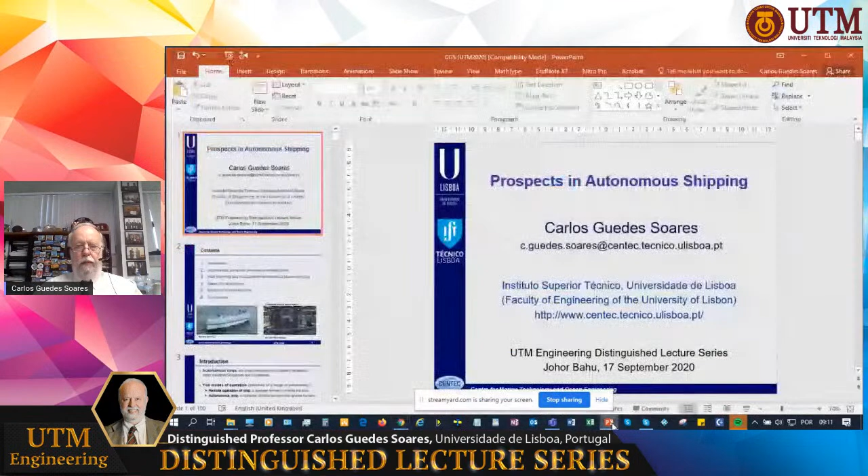I hope now you have been able to see the introductory slide with the indication of the title of my talk. Yes, Prof, we can see the slide. Thank you. Very good. Thank you very much.

So I think I can proceed. My lecture is a generic one, trying to bring the main points that are being discussed and involved in this problem, which is very complex and has different implications in the shipping and maritime industry. So I will be talking generally on the existing autonomous ships and remotely controlled ships, and we will discuss the differences.

Then I will discuss the main aspect of the autonomous ship, which is path planning and guidance. This is the main technological aspect that will bring the ship from one place to the other. And then I will address related aspects of safety and economy, which are important aspects that can motivate or allow this concept to go ahead, or can hinder it from progress. So those will be the main topics.

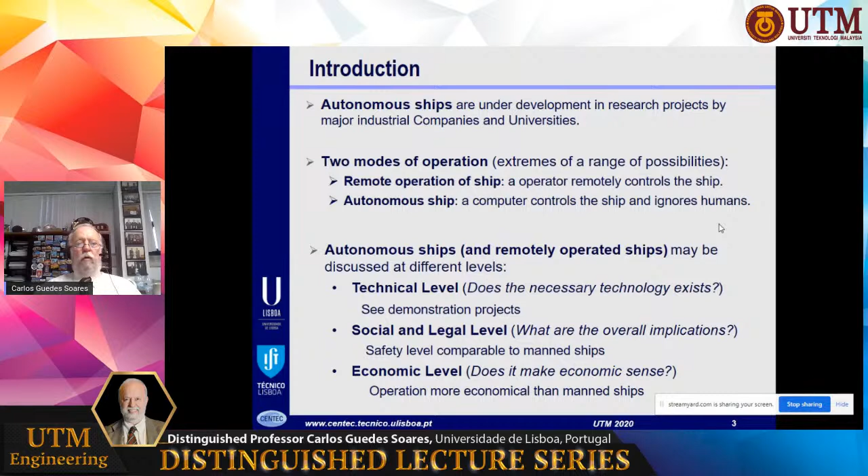Now it is important to start making some distinction between what is autonomy and what is automation. Autonomy is the ability of a system to make decisions, to adapt to unplanned circumstances, and to achieve what is expected from the system. So these decisions will be made without supervising agents within the system. Automation is simply to substitute a task that has been executed formerly by humans, which now will be executed by a technical system. So obviously an autonomous system must be automated, but an automated system is not necessarily autonomous.

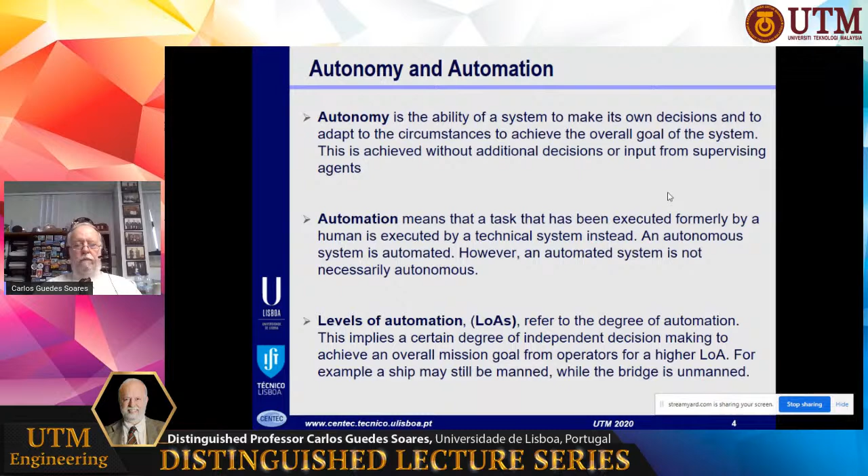And the other aspect that we need to consider is that there may be different levels of autonomy, different levels of automation, which refer to the degree of automation that is implemented in the ship.

In general, we will think that the autonomous ship operates with a dynamic autonomy, in which this level of autonomy is adjusted depending on a number of parameters that include the state of the ship, the weather conditions, the traffic density, the distance from the coast or the port. The basic idea is that ships will be autonomous when performing simple tasks. But when situations become complex, it is necessary that the human is supervising what the system is doing, and eventually is controlling it remotely in those conditions. So autonomous ships always require a monitoring and control center on shore.

You certainly see immediately the parallel situation with flights, which in the last few months we have not been able to travel and fly, but transportation aircrafts normally operate with control mechanisms, but for landing and starting the flight, then there is manual control. So this is a parallel to what is expected to be done in ships.

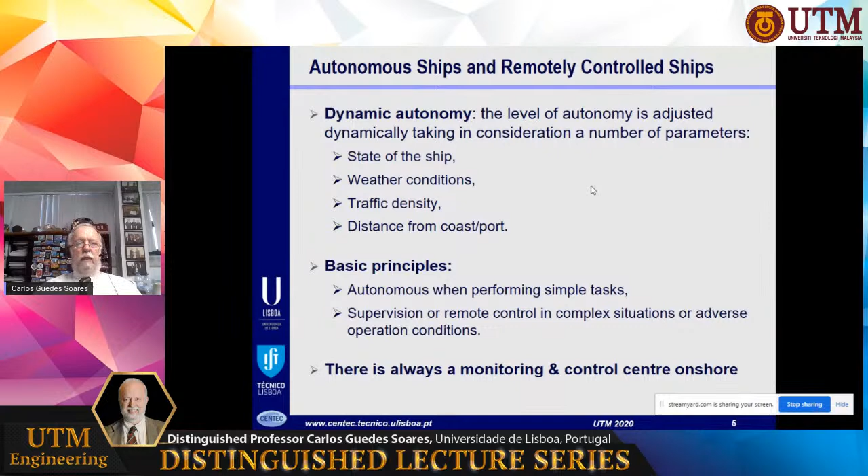Now the technologies for autonomous navigation, which are the main aspect that we require, are available. And in the case of the ship, there are some advantages compared to other autonomous vehicles, like cars and airplanes, which also are moving in the direction of autonomy or partial autonomy. So ships have low speeds, and this gives more time to interpret the sensor data and react on it. The requirements for ship maneuvering are appearing slowly, so it also gives time.

In general, the ship at sea is not confined to roads, to limited areas like a car. Although in some cases we have traffic separation lanes, and in those cases the ships have to go through a lane, which is a type of road. There are several options to collision avoidance, and in general there is less traffic density with ships than with cars.

The disadvantages are that the inertia of a ship is much larger. It is very difficult to maneuver and to stop a ship, and the communications can be difficult.

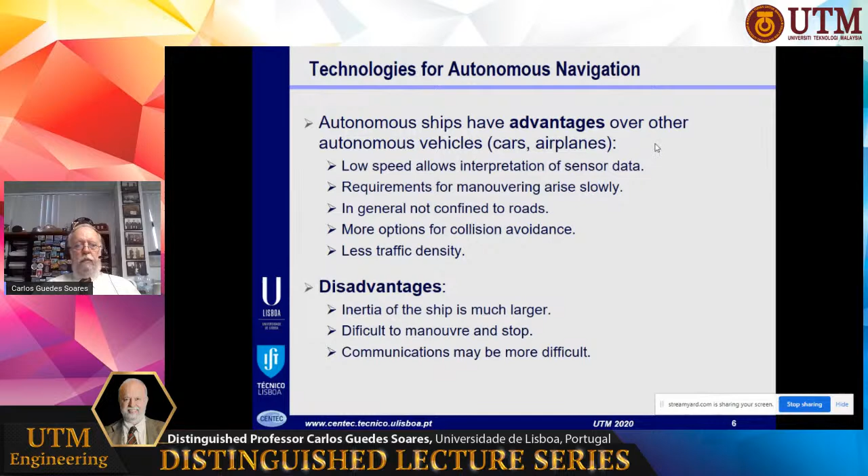Now, the main technologies for autonomous navigation are available, although they need some development and adaptation for autonomous ships.

Typically, the long-range situation is controlled by the ship radar, and in manned ships, the short range is done by humans that observe. Moving to autonomous ships, we have to use cameras to identify objects and short-range radars. There is also under investigation the use of LiDAR with cameras and radars.

So these are the areas that are under development for autonomous operation. We have to process all this data to identify all the obstacles at short range. Then with the information from GPS and the inertial sensors, we have the position of the ship, which can be related to the electronic charts to decide how to navigate and eventually avoid collisions if we have short-range obstacles.

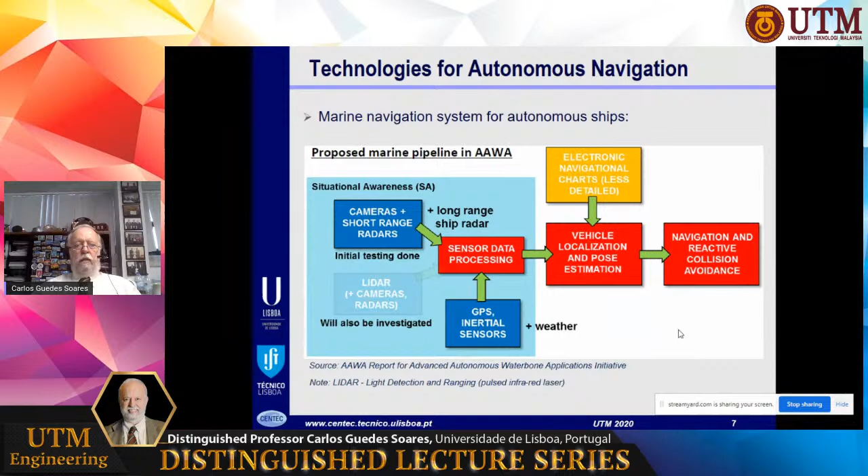So as I say, we have technology available. It is the short-range visualization, identification of the targets that still needs some further development.

Now, what are the drivers that are promoting autonomous shipping? Well, the advances in guidance and control of small autonomous vehicles provide the knowledge of the technology for moving the ship. We also have the problem that maritime safety

is very much related to accidents that are caused by human error. So there is this idea that substituting the human by a machine, we will have fewer errors and then we will have a safer environment.

There has also been an increasing difficulty in hiring competent crew for the ships. Life on board is more harsh than living in a big city center, so there has been less incentive for people to choose that profession.

Also, the manning on board is an important part of the cost of operation, so shipping companies have an economic incentive to reduce manning. And in general, the reduction of overall costs of maritime transportation is a trend that

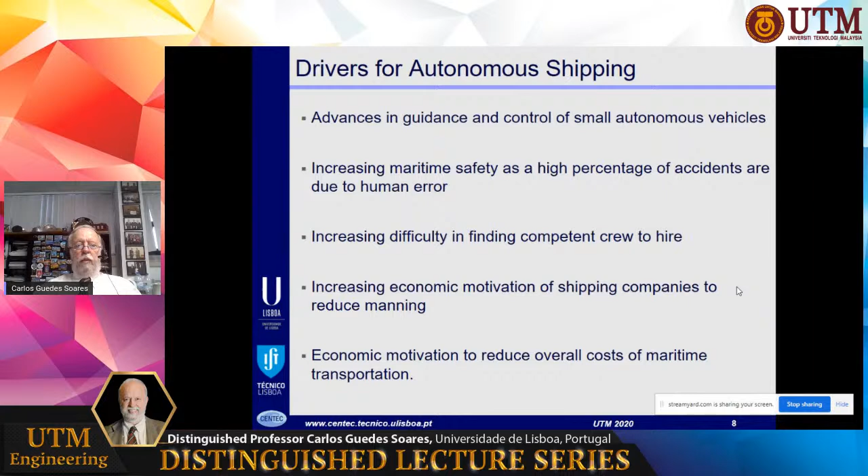looks at autonomous shipping because of this idea that reducing costs with the crew would lead to a more economic operation. The drawbacks and difficulties in promoting autonomous shipping are that there will be higher costs of additional equipment. Control, communication, and this type of equipment must be put on board. There must be redundancies, and this will add costs.

With so much equipment, the equipment also has probabilities of failure, so the ship will also be prone to accidents due to equipment failure or malfunction. And this will compete with the human errors of the manned situation.

Autonomy will also require onshore monitoring centers manned 24 hours, and this represents additional costs in establishing these centers and in manning them with crew.

Furthermore, to keep the safety of maritime traffic, it is being considered that there probably must be separate safe lanes for these autonomous ships in the approaches to land and ports when traffic is higher. This must be created to make sure there is a separation between autonomous ships and manned ships.

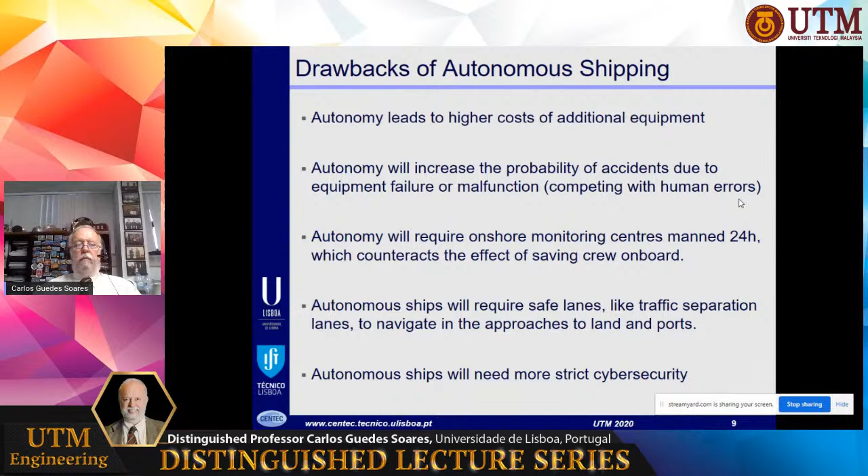Finally, autonomous ships will be prone to cybersecurity issues. They will be prone to cyber attacks, and therefore this is another area that needs special attention and, of course, investment to make sure that we have ships protected from that.

So how is the industry looking at this? Well, as you could imagine, equipment manufacturers are the main driving force, since this would need more equipment, and this would be very good for the equipment manufacturing industry.

Now, seafarers are profoundly opposed to this idea, as it happens in all industries where we see increased automation. There will be a big resistance in this direction.

Ship owners have been very quiet. On one hand, I think they are not convinced that this will be an economic success. On the other hand, I think they don't want to create frictions with their seafarers by advocating a solution that is not welcome by them.

The insurance companies are still not sure what is the safety level and how they will insure this type of vessels.

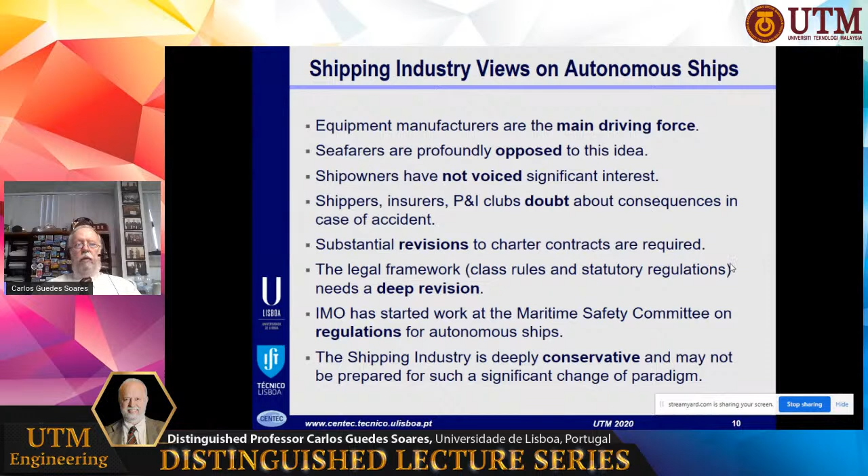If we move to autonomous ships, the charter contracts have to be revised, and the legal framework for the operation of these ships will need to be revised very much. The IMO, the International Maritime Organization, has already started working on this topic, looking at specific regulations to apply to autonomous ships. However, the shipping industry is somewhat conservative, and it may take some time before they are ready to really change the paradigm from manned ships to autonomous ships.

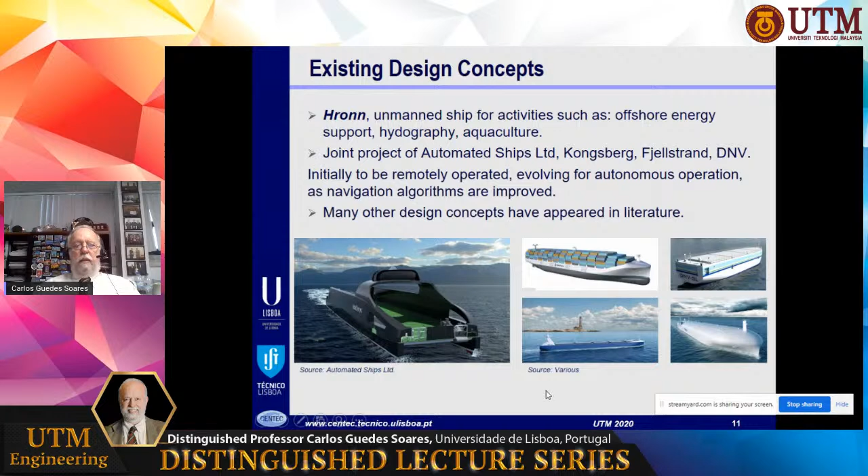Now, there are some concepts already available that have been developed in these research projects. There are designs that go from small ships like this one, for activities like offshore energy and aquaculture support, to larger ships like container ships and bulk carriers that have been designed and are being studied. We also have demonstrators that have been testing some of the technologies.

This is an example that was developed in this project on advanced autonomous waterborne applications. It is a double-ended ferry that uses radar, visual and thermal cameras, and LiDAR. As I indicated earlier, one of the challenges here is short-distance identification, and this is exactly what has been tested in this ship in bad weather conditions.

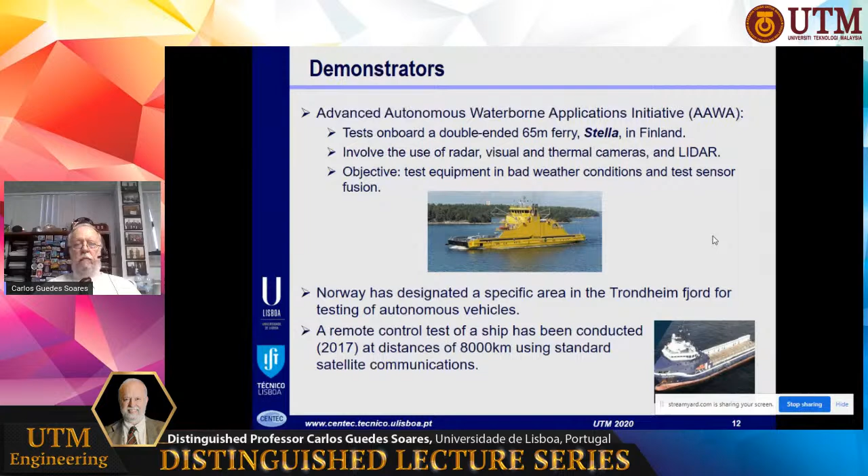Also in Norway, there has been testing in the Trondheim fjord. The autonomous vehicles have been tested to demonstrate their capabilities. I think presently the largest demonstrator is the Birkeland.

This is a container ship that has been developed to transport fertilizer from an inland plant to deep sea ports, over a distance of around 30 nautical miles.

This ship has already been built. It was launched in February 2020 in Romania, and you see it here. This is the model test, and this is the ship as built. Although, because of the pandemic, it has not progressed much since this period. But as you see, we have a demonstrator of 80 meters, a container ship, already on the way. It is 80 meters long and carries 120 TEU containers.

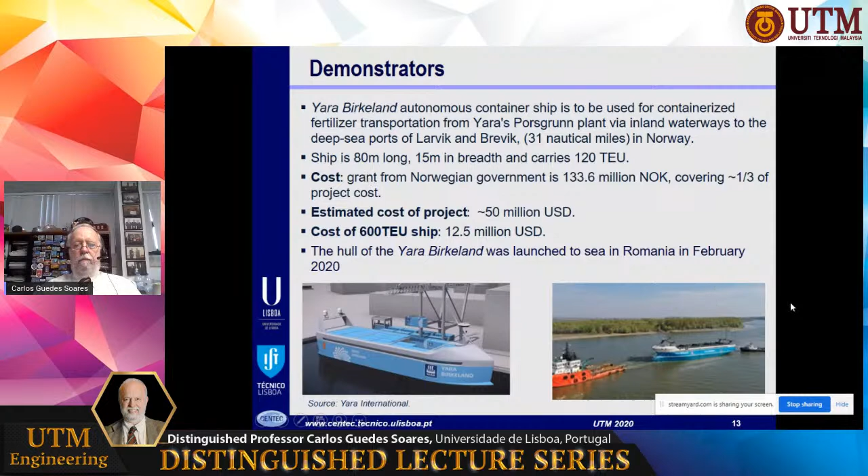Okay, so those are the technology aspects and how far we have arrived with the technology. We have already built one ship like that.

Now, the other aspect that needs to be considered is safety, as I have indicated earlier. The main concern is that the autonomous ship must be as safe and reliable so that it can be accepted by the regulatory bodies and by the public. The public may even demand that autonomous ships have a better safety performance than conventional ships, in the sense that why change if we are not changing to a better product? So it is necessary to demonstrate that the systems will not lead to an increased level of risk, in particular to loss of life, damage to the environment, or damage to the assets.

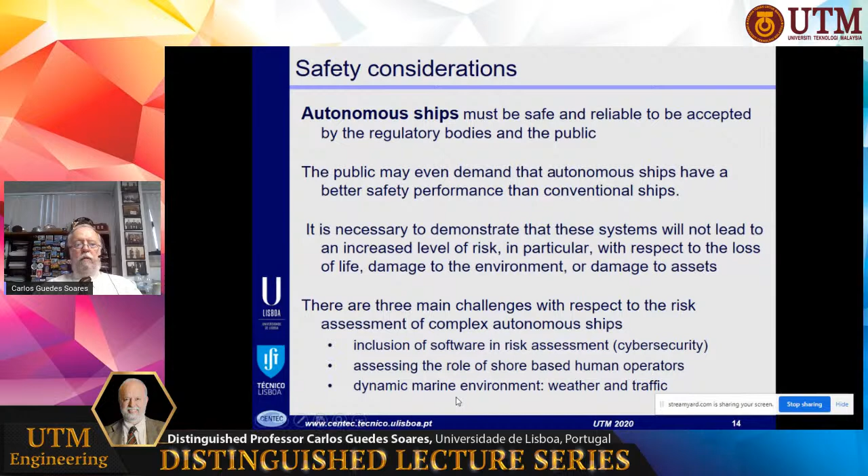And there are some main challenges in this. One aspect is that now in the risk assessment we have to include software, because the ship will be controlled entirely with software that controls all the control equipment and everything else. We have to assess what the role of the human operators is in the shore-based control. How do they interfere with safety? And what happens in dynamic environments, such as bad weather and heavy traffic.

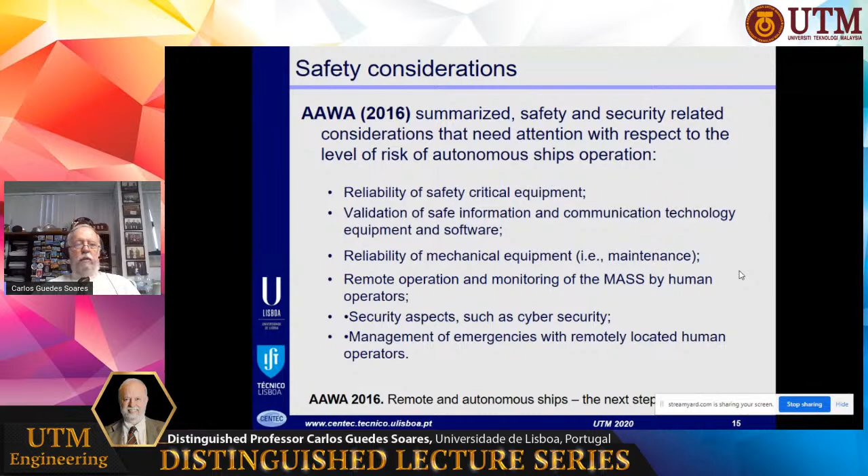We had an international consortium in a project that looked into this, and they summarized the safety and security considerations that need to be considered for assessing risk in autonomous ship operations. This includes the reliability of safety-critical equipment, the validation of communication technology, equipment and software, the maintenance aspects related to the reliability of mechanical equipment, the monitoring of remote operation by human operators, all the security aspects, in particular cybersecurity, and how we manage emergencies with remote operators. So these are the challenges that need to be addressed, and later in this presentation I will address them in slightly more detail.

On the economic front, which is another aspect that needs to be considered, we need more control equipment for the crew. However, we do not need onboard equipment for supporting the crew on board, and we also save the energy that is needed for that support equipment. This also allows for more space that can be used for transportation of cargo. However, we may need to use better quality fuel to avoid difficulties in operation. We will have extra costs for shore monitoring and extra costs for operating the shore monitoring center. So we have to balance all these different costs and check if the operation will be profitable, and therefore attractive to ship owners.

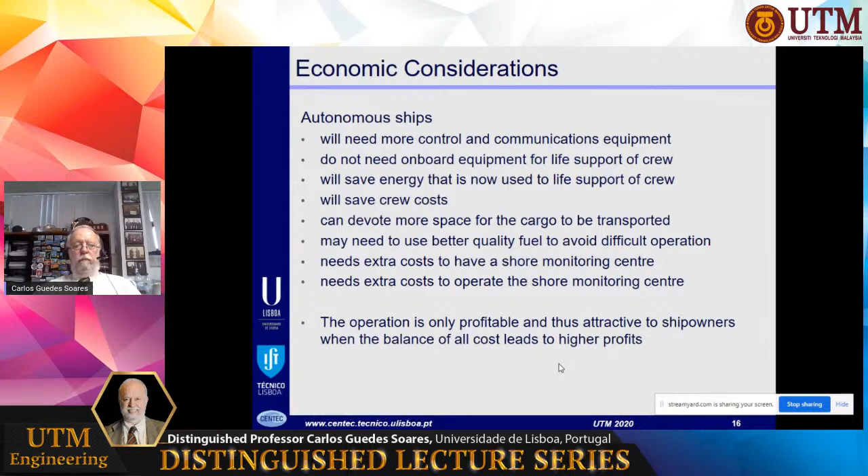So I hope I have given you a general overview of the problem area, and the constraints of both safety and economy.

And now I was planning to go relatively quickly through the technological aspects of the main part, which is the path planning and guidance of the autonomous vehicles.

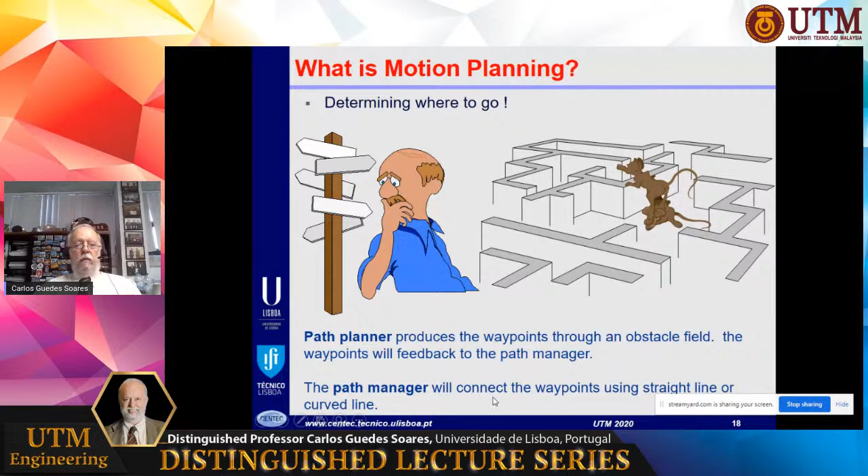First of all, let's clarify what motion planning is, which is the starting point. We have path planning that identifies the path that needs to be followed from the initial point to the final point, and this defines waypoints that need to be connected. Then we have a path manager that will connect these waypoints with straight lines or curved lines.

So we have the control architecture of the autonomous vessel. It has the path planning that uses the map, the destination, and the identification of static obstacles, and then defines the waypoints that will bring it from one point to the other. This gives information to the path manager that defines the path connecting the waypoints, and then passes the information to the guidance system that follows the path by defining the speed, the heading, and the commands that need to be taken.

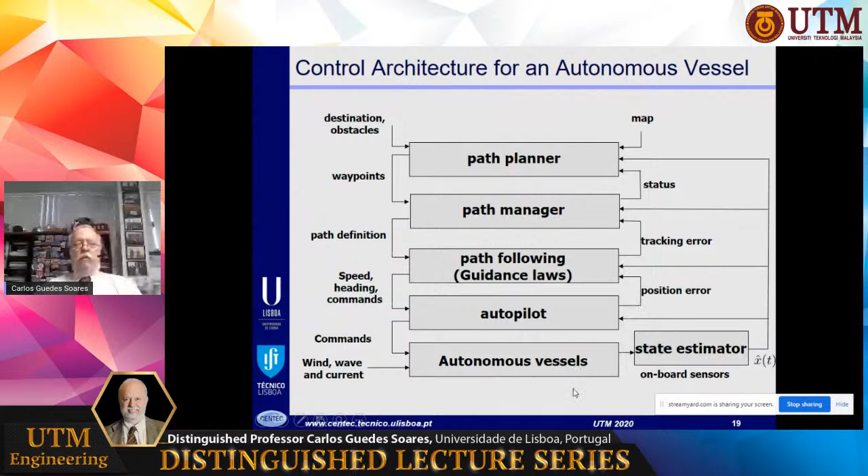The autopilot then makes sure that the heading of the ship is such as to follow the path, and the autonomous vessel will be acted on by external disturbances like wind, wave, and current, which will move it out of the path. So we have a state estimator based on onboard sensors that checks the position and feeds back to the system to check whether it is on position or needs correction. Those are the main elements of the architecture to ensure the ship follows the desired path.

Path planning and trajectory are related concepts. The path is just based on kinematic specifications, so it gives the geometry of the points where the ship has to go by, and the trajectory is the path plus the assigned time at which the points have to be passed. So trajectory planning has the path planning plus the control of the propulsion system to make sure the velocity of the ship is such that the time is observed at those points.

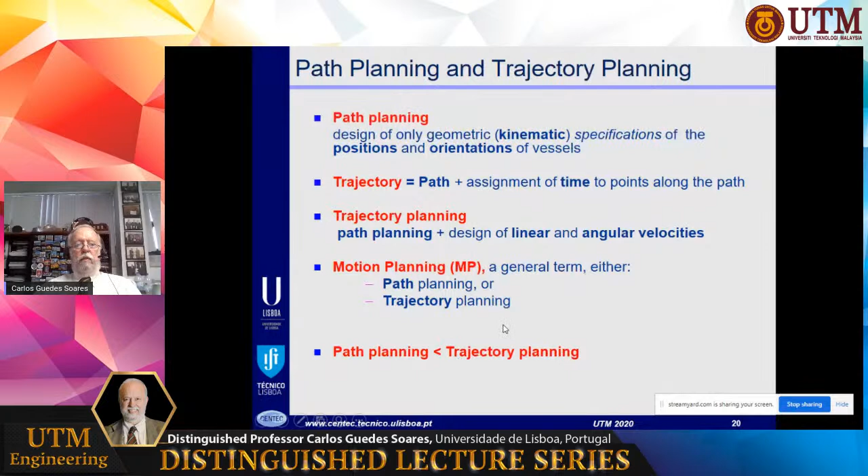In general, motion planning is used both for path planning and for trajectory planning, knowing that trajectory is a wider concept and path planning is sort of a subset of the trajectory. There are many techniques to identify the path; I will just mention a couple of them.

The Voronoi graph has been used, and the idea is that if we have a set of fixed obstacles and we want to go through them, the safest path is to keep the same distance from both obstacles. So this would be the safest between these two. Then if we want to go through these two, this would be the safest, the half distance between them. This would be the half distance between them. Therefore, the ship would go in a path like that to keep the largest distance away from stationary obstacles.

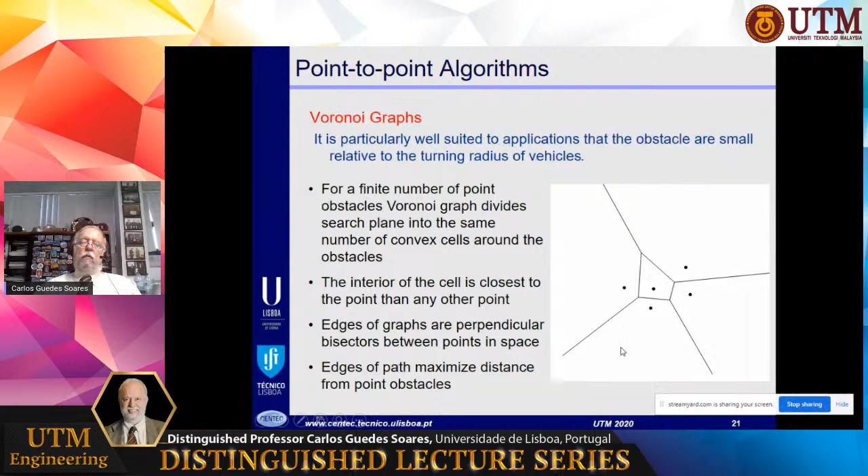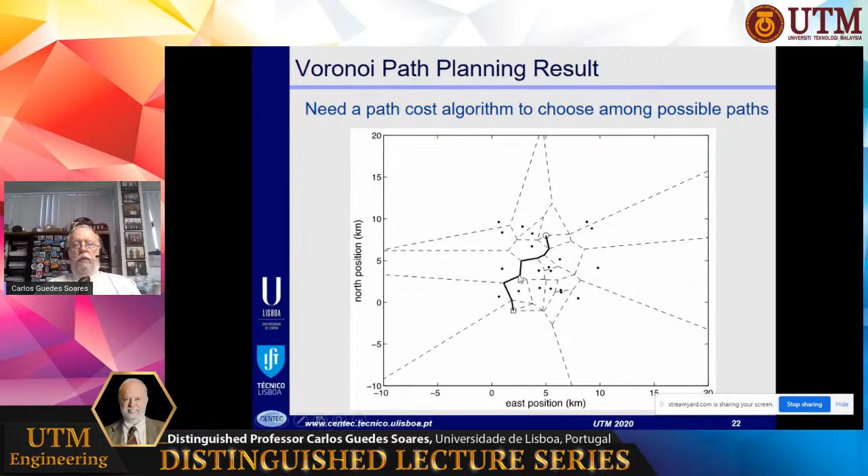So we see an example here where different paths have been possible, and then an optimization algorithm will choose the minimum cost path between the two points, which in this case is this one.

Here is a realistic example done in Norway, in which this technique was used, and you see the path that was chosen between these two points. These are the elements of the graph, these are the waypoints in red, but we don't need all of them, so only these green ones are chosen as the main waypoints. These are the points that have to be followed by the ship as determined by that.

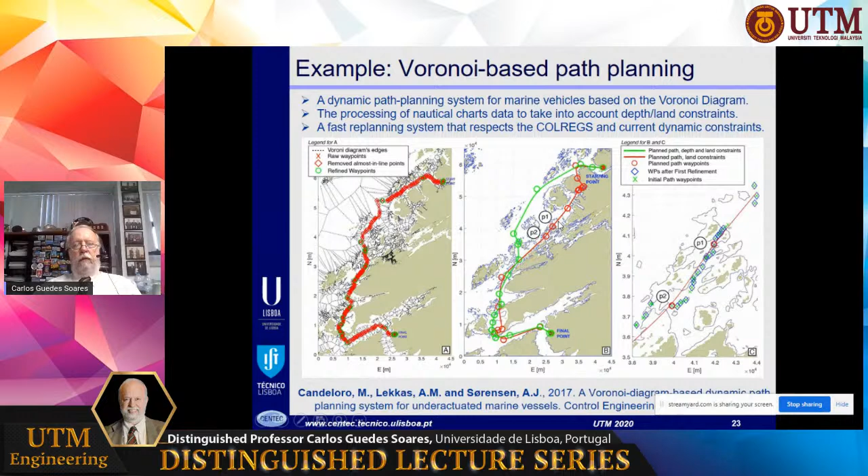We can apply this for different criteria. Here the criteria was the distance to land and also the depth constraints, so for ships with a large draft we have to check the depth. If a ship has a low draft and there are no depth constraints, the algorithm would give this other path which goes closer to land, and it's a different one. So this is a technique that can be used in realistic cases and produces results like that, the path identified by those waypoints.

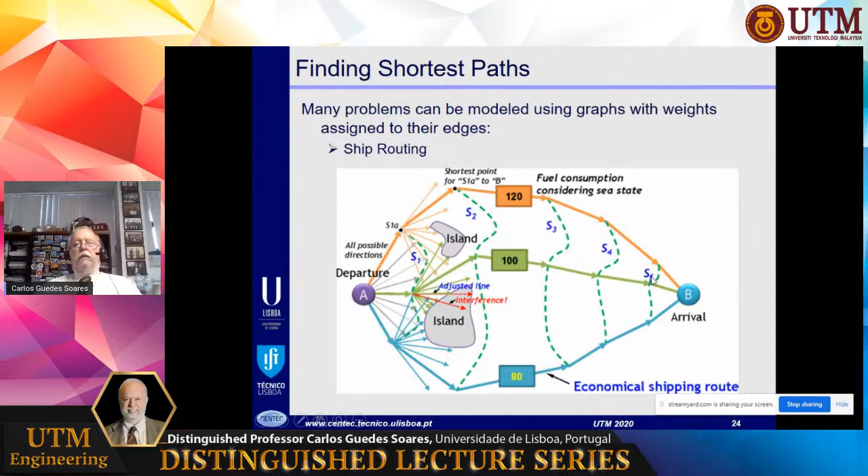After a certain time, the ship would be in these different positions depending on the direction, and then another path would be chosen. Paths that go through obstacles will be eliminated, and only the ones that do not go through the obstacles will be chosen. This then would allow different paths to be chosen.

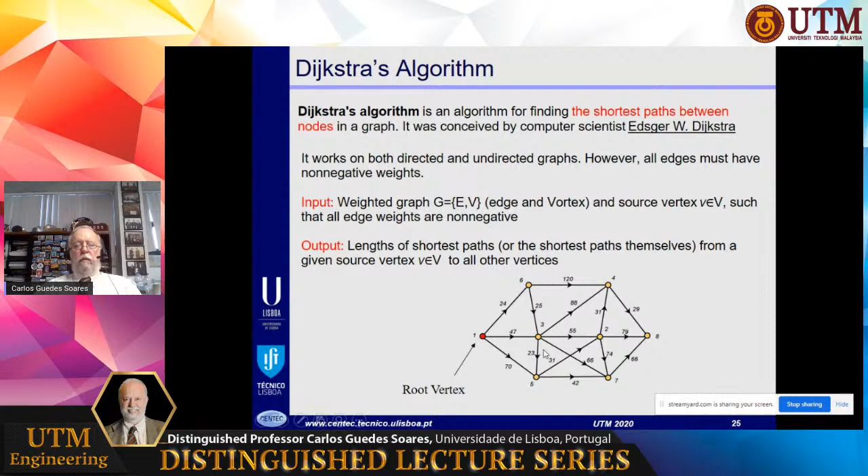An algorithm then can be used to optimize. The so-called Dijkstra algorithm has been very much used here, as in many other transportation problems. We would have a network with weights associated with the distances or the time necessary to go from one point to the other, and then an optimization algorithm would choose the path with the best performance going from one point to the other. I'll give you an example on a ship weather routing system that uses this type of approach, the Dijkstra algorithm.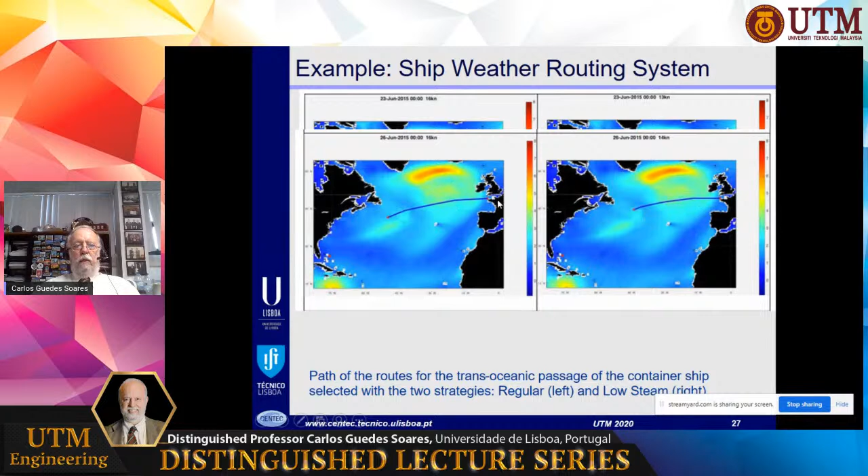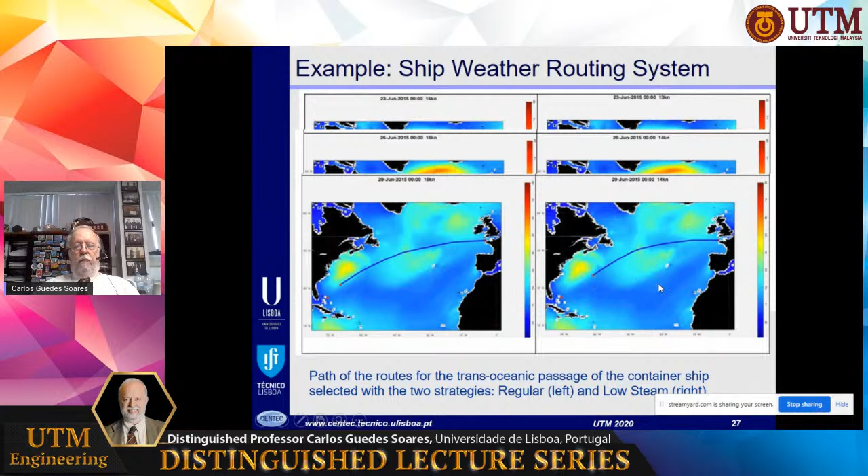One is the regular one, and this is the low speed, the low steaming alternative with a lower speed to save oil. We see the development of the storms, and we see that there was a change of course here, avoiding that storm. Finally, we also see another one, and after this time, it reached further than the lower steaming one, avoiding the bad weather.

We have also an example in more coastal type of traffic, in the Mediterranean, with a fishing vessel starting from here. Here it chooses the safest route, here it chooses the fastest route, and you see that the safest one went around the islands. The duration-constrained one crossed between the islands for a shorter trail, and then after some time this managed to get further down because it was duration constrained.

So we have these algorithms that allow us to determine the best paths to be followed by the ships, and this is the starting point.

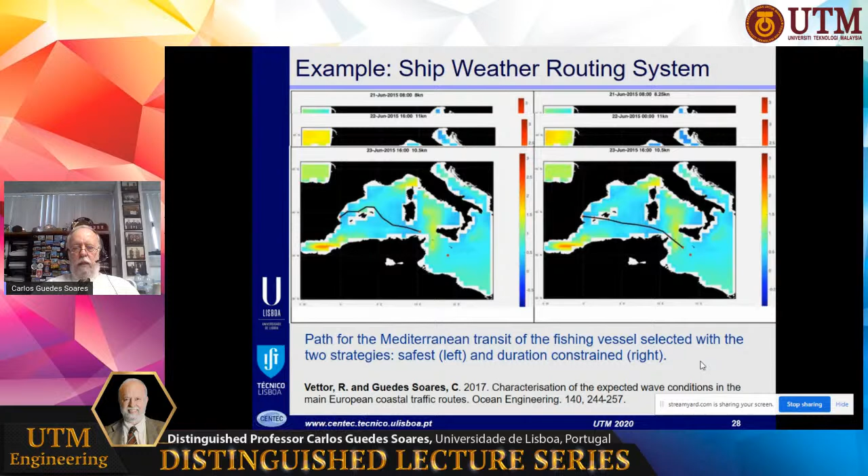Now, having the path defined, we have the guidance system who takes the ship through that path. The guidance system starts from a measured position and velocity, knowing where the ship is, and then it wants to arrive at a desired position and at a given velocity.

It uses information from the weather, from the fleet, from all that basic information, and then sends signals to the controller that allocates the sensors and the actuators, which in the case of the ship will be the rudder to control the heading, and the propulsion to control the speed.

Then we have the navigation system that identifies the position of the ship and feeds back the position and the situation, so that we have a feedback loop here to control the system. In this way, we make sure that the ship follows the path that has been defined by our path planner.

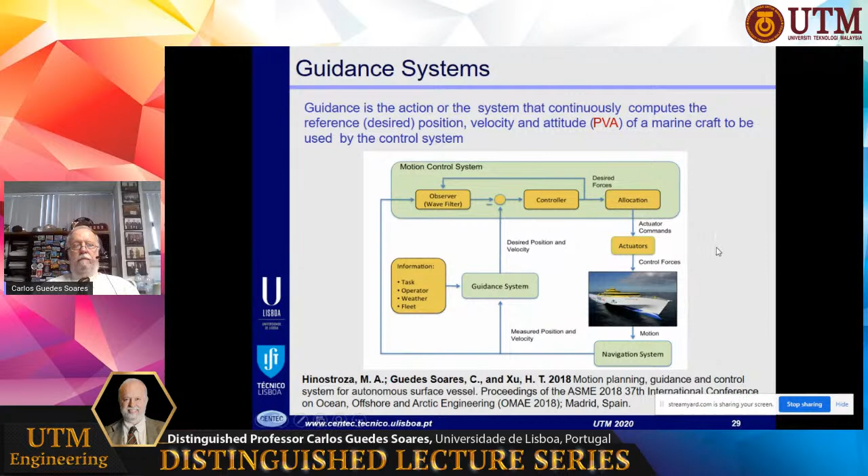So we have two main aspects: the attitude control and the path following control. The attitude control is the autopilot that controls the heading of the ship. Then we have the other motions, the roll and pitch, which are the rotations around the longitudinal and transverse axis, which we would like to be zero, so no imbalance of the ship. But often they are uncontrolled, so the ship will roll and pitch depending on the weather.

The path following control is what keeps the craft on the path. It uses the weather routing program to give the trajectory, which then controls the autopilot that controls the actuators on the ship. And then we have the navigation equipment to check the position. So we have the guidance system, the control, and the navigation system.

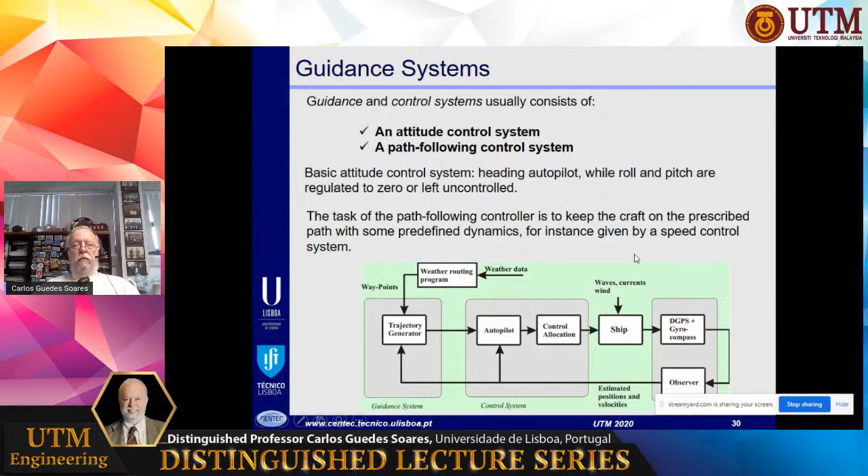In general, we work with paths generated by waypoints. We have several points that need to be followed. We also have information data about wind, waves, and current that is available, and geographical data about water depth and islands included, which gives us the information on the static obstacles that must be avoided.

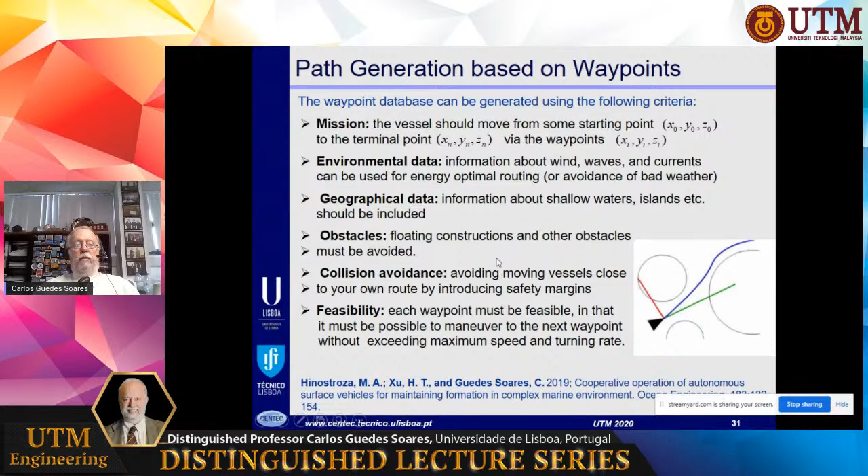However, we also need a dynamic aspect relating to collision avoidance, because we have traffic, moving vessels that may be close to our vessel, and we have to make sure that we avoid these vessels and then come back to the waypoints. So collision avoidance is also an important aspect that needs to be considered in autonomous vehicles.

The path following strategy, the most common one, is the so-called line of sight. The idea is that if you are on a ship and you want to follow a certain path, you look as far as you can see on the horizon, and then you head the ship towards that. This is the most frequent method that has been used.

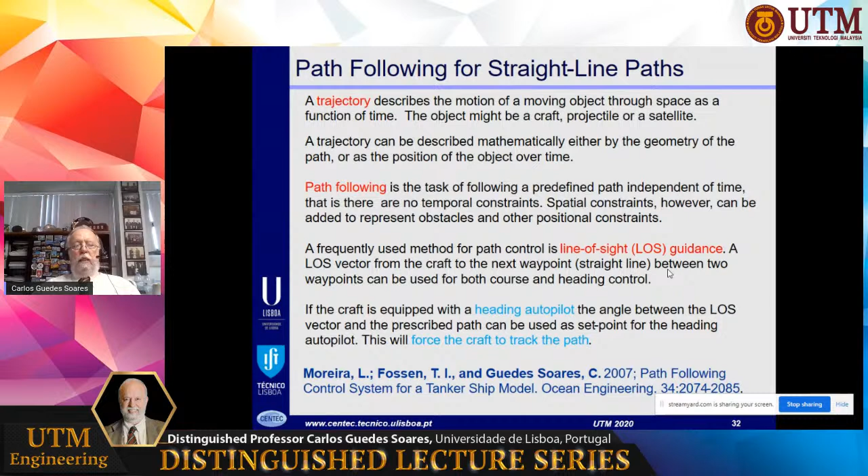What happens is that if the ship is very much out of track, using this type of guidance, you can go in a direction perpendicular to the track to get to the track as fast as possible, and this loses energy and is not very efficient.

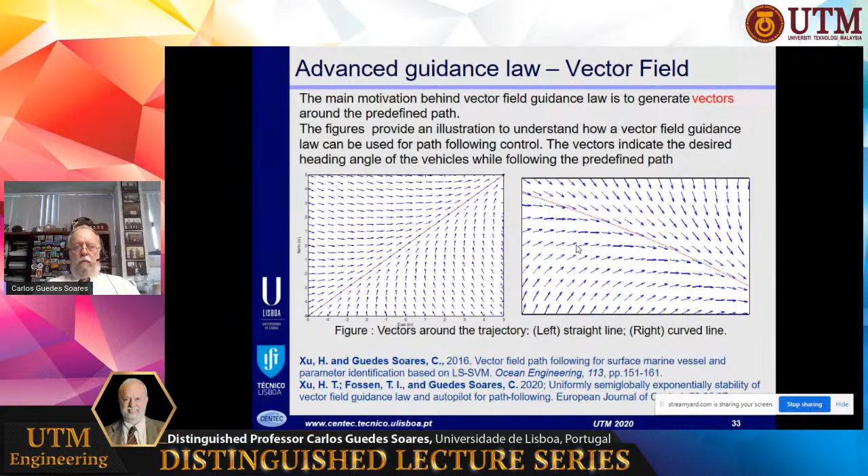As I said earlier, we need to handle collision avoidance very seriously, because those are the dynamic aspects that appear and need to be avoided. Typically, to do that, we need to have an intelligent navigation system, which has to have a module for vessel monitoring and information system, which identifies all the target vessels nearby, and then tracks the motion of these vessels to identify if any of them are on collision course. Then we need a collision avoidance system, which makes the ship avoid the collision with any target.

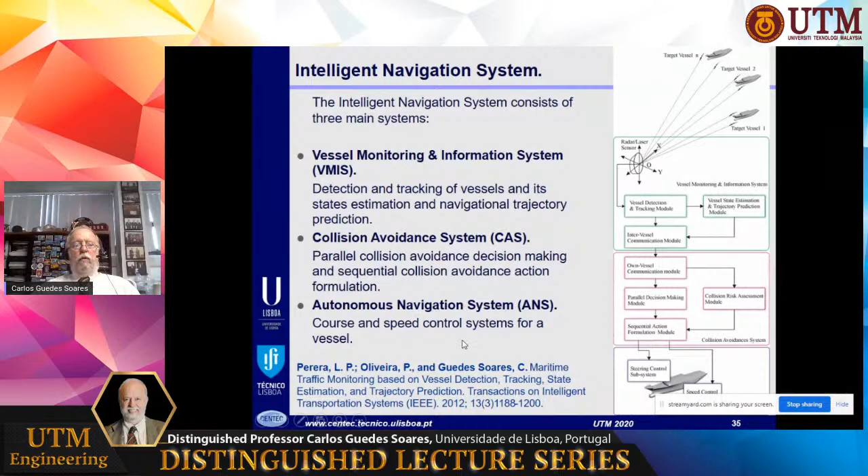That is on collision course. And then, of course, we need the autonomous navigation system to define the course and speed control in the avoidance of collision.

So this vessel monitoring and information system very often works based on artificial intelligence. We have the vessel detection and tracking. Neural networks are often used to identify what kind of vessel is coming and what track it is following.

We also have to estimate the trajectory of these target vessels and predict their future trajectory, and this can be made by an extended Kalman filter. And eventually, if there are communication modules, this will help to force communication between vessels to help make sure that vessels will be taking

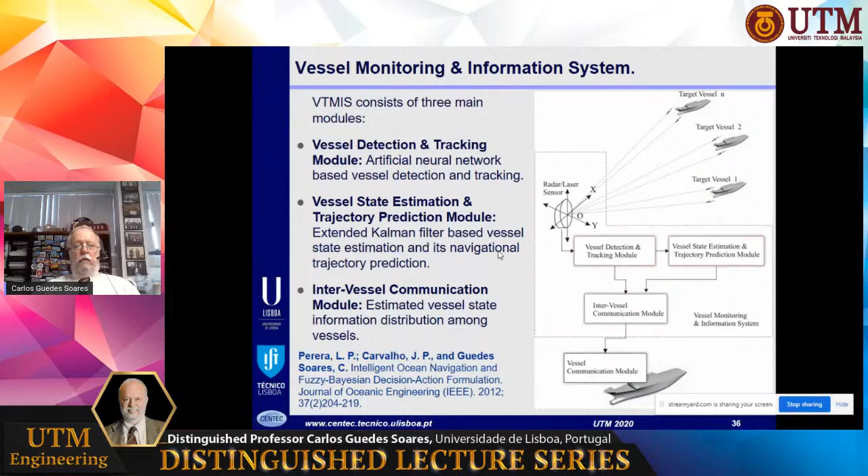Measures to avoid collisions. The collision avoidance system also has the communication module itself, and then it has a decision-making module that makes decisions to change course and speed to avoid collision with the ship.

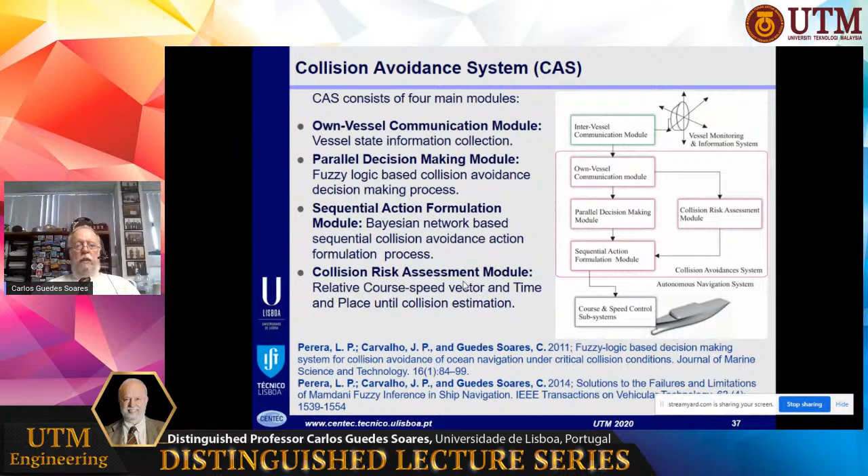In a complicated traffic situation where there are several targets, this decision must be sequential, because it has to be done for the various targets, avoiding one, then the second, then the third, and Bayesian networks have been used to do that. We also have a collision risk assessment that, based on the identification of the tracks of the target vessel, decides when it should be necessary to avoid the collision.

The avoidance of collision has to follow the rules of maritime traffic. These are the collision regulations, COLREG as they are called. And if this is our vessel and this is the incoming vessel, then depending on the relative position between them, there are rules about what both vessels should do.

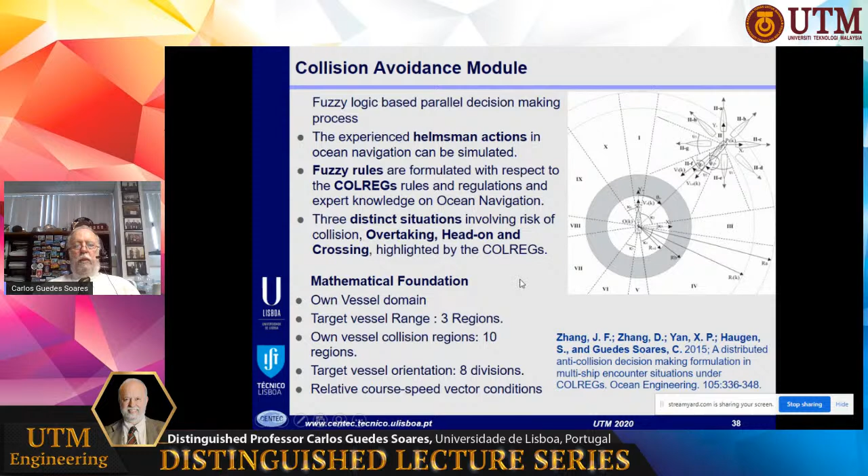I think we are all familiar with the rules that exist for traffic with cars, you know, when you have to yield the priority to other vehicles, and these rules are the same. So the collision avoidance module has to follow this type of rules in deciding what action to take depending on the relative position of the vessels.

All right, so I think I have given you a very quick overview of the technology and the main modules that the ship needs to have to make sure it does autonomous navigation. Now I will address quickly the aspects of safety and economy which need to be considered.

Safety of maritime traffic can now be monitored using automatic identification systems, a tracking system that ships of a given size have to have on board. Ships transmit periodically, every 2 to 10 seconds, information on their position, heading, and so forth. This allows centers that collect this information to have an overview of traffic worldwide.

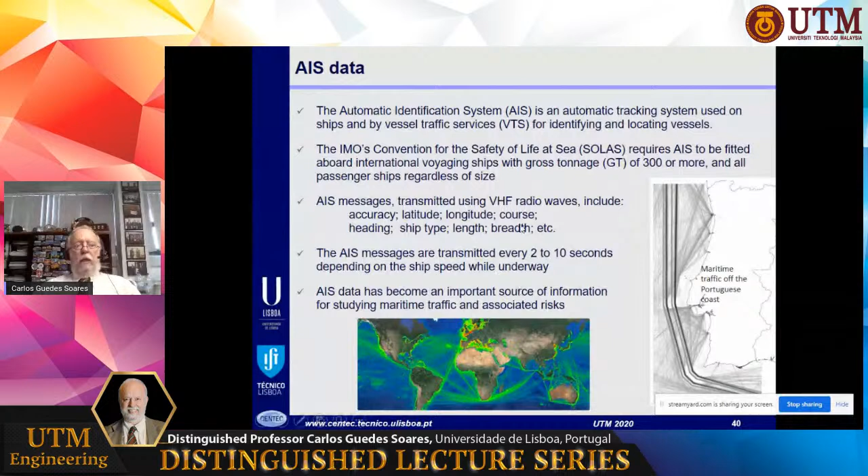Here are the lanes that the ships cross, going southbound or northbound. And this traffic comes from the Portuguese ports, which cross these lanes, creating conflicting situations with the traffic. So one can use AIS data to study the traffic and assess what is the main ship routes.

So one can analyze the AIS data to identify the routes, to make trajectory prediction for ships, to assess ships that are in collision or have the risk of collision because they are too close. We can identify ships that have abnormal traffic when they go out of the main area, and the risk is also assessed by studying in detail the accident reports, where the influence of human and organizational factors is identified. So those are tools that we use to assess the risk of maritime traffic.

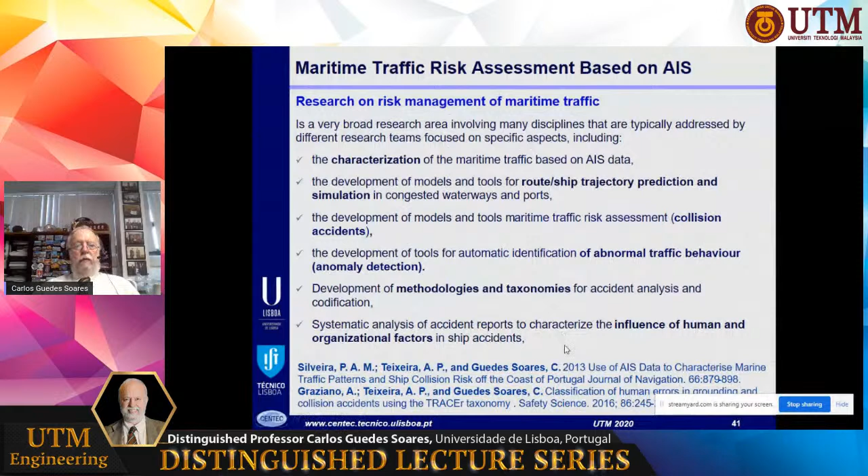We have been developing different risk models that look at aspects of different conditions, like what adverse weather conditions and human factors have on ships. We have also seen the effect of the response to marine accidents, how the response has to do with the safety level. More recently, work has been ongoing looking at the resilience of marine transportation systems, of integrated systems, and also on the safe operation of autonomous vessels, and how autonomous vessels will fit into this maritime traffic.

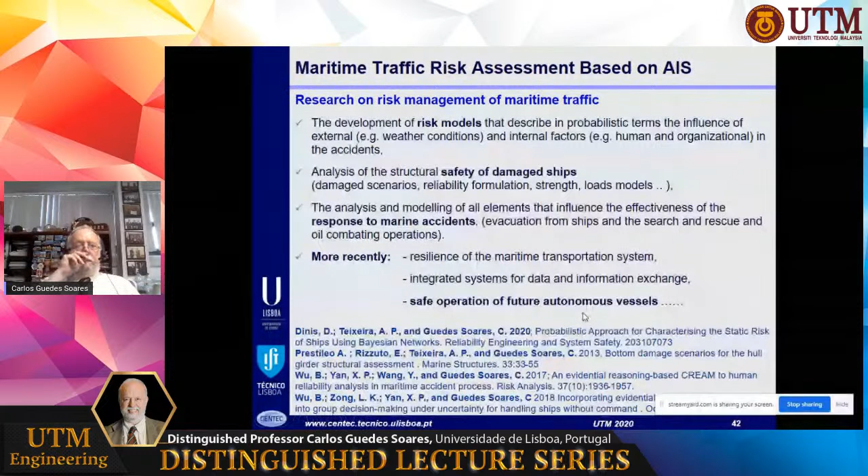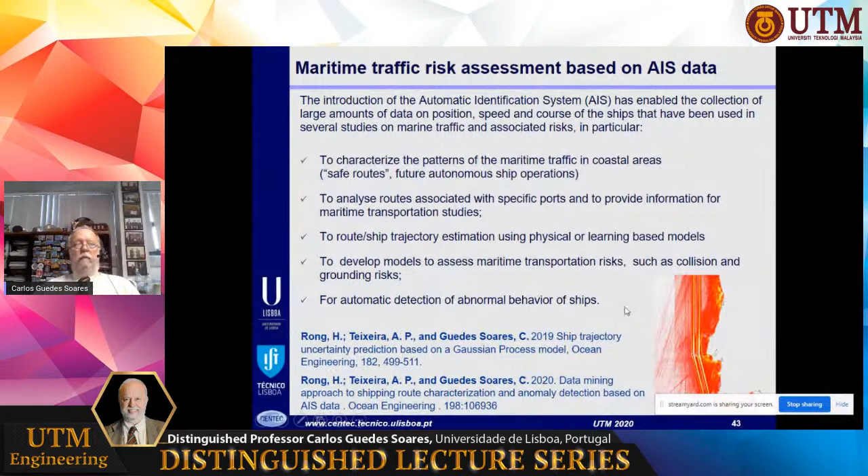In this way, we can also identify the probability of collision. The collision risk depends on the collision probability and on the consequences of collision. The consequences can be loss of life, damages to the ship, and damages to the environment. However, the collision probability is what we want to reduce in the first place.

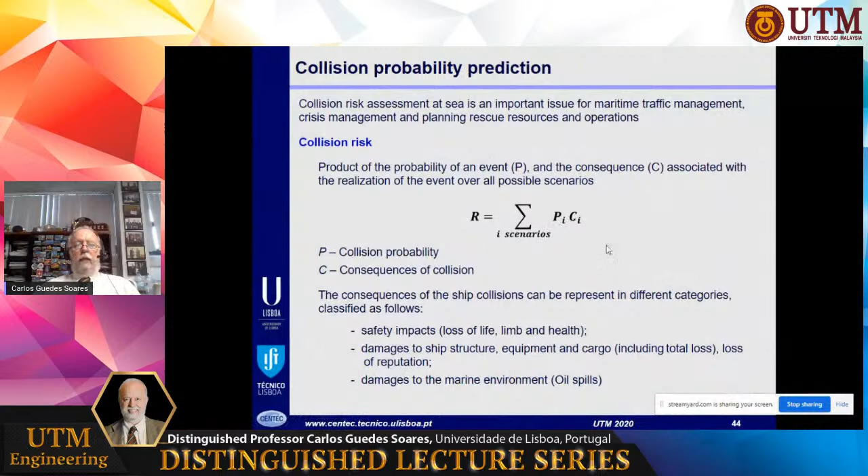This has to do with the number of ships that are present, multiplied by the probability that the ships will cause a collision. Intuitively, it's easy to see that if you have many ships, then you will have a higher probability of collision than a situation where you have very few ships.

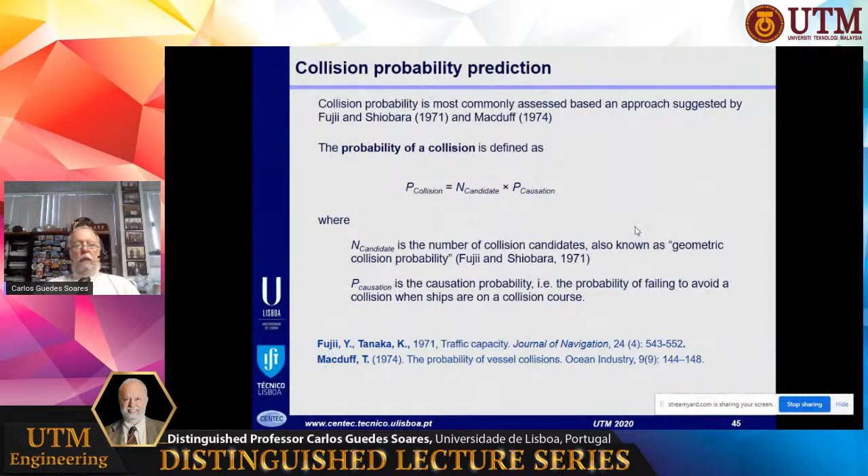This calculation of the probability of collision can be determined based just on accident statistics, by analyzing the statistics where collisions have occurred, or you can build a model of the errors that can lead to collision, and this would lead to collision probabilities. Work has been done on both approaches to assess collision probabilities in different areas, mostly close to the coast.

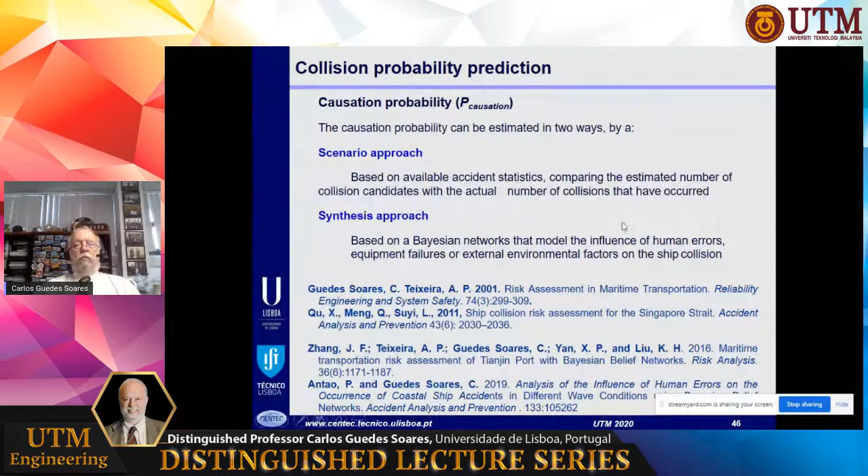Now, the collision candidates, or the situations in which one can have a collision, are identified with a so-called safety boundary approach. This puts a safety boundary around the ship to indicate when danger of collision occurs, or just by looking at the absolute and relative speed and looking at what is the distance in the closest point of approach if both ships continue in their trajectories.

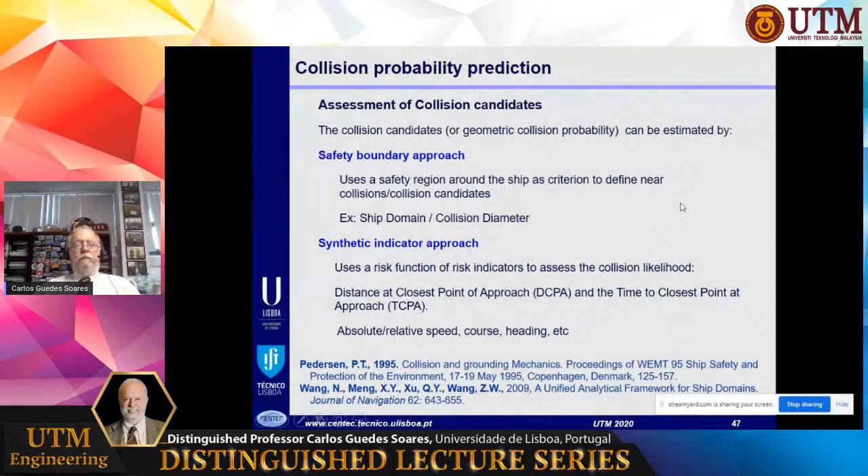So this is the ship domain approach. Depending on the size of the ship and on the speed, we have a ship domain that defines the safety area around the ship. When the safety areas start overlapping, then we have an indication that collision may be imminent or may become a problem. And when the ship violates the safety domain, then we have a critical situation as concerns the collision.

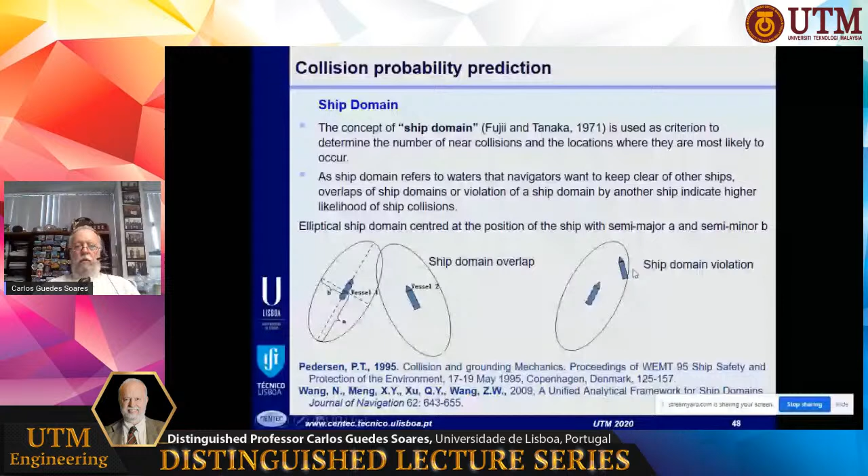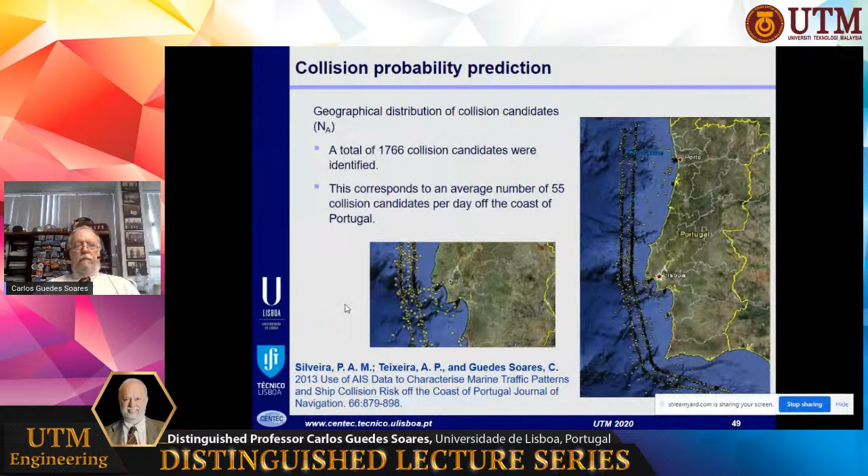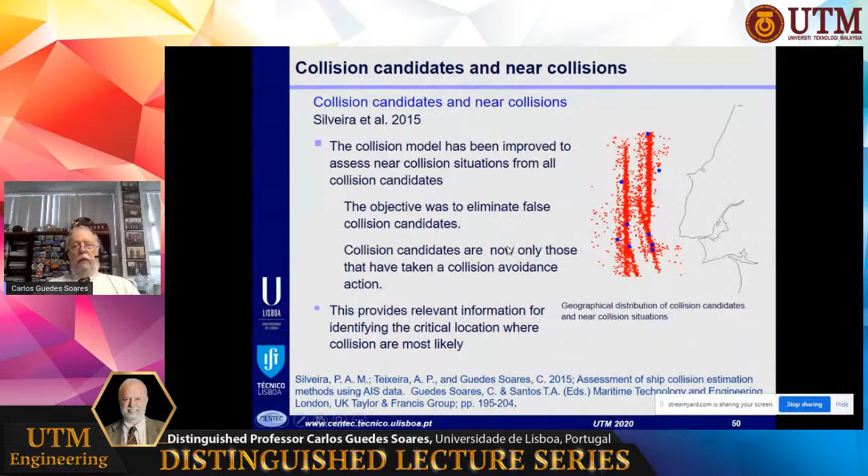Now, from the collision candidates, we have near collisions, which are cases in which the ship goes into the safety domain and becomes very close to a collision. From all these red dots of the traffic, we have these blue dots, which are the cases of near collisions. This can also be identified from the analysis of AIS data.

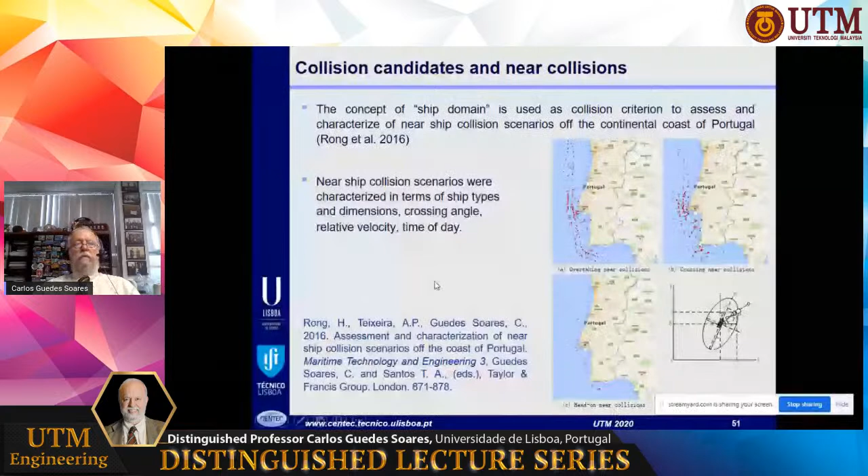We can go into further detail, looking at the directions, and identify the situations in which this happens. So these are the cases of overtaking, when one ship is overtaking the other. These are when we have crossing, one ship crossing the path of the other. And these are head-on collisions, when the ships go in opposite directions and meet. You see that all of those are identified. This system allows us to identify these situations.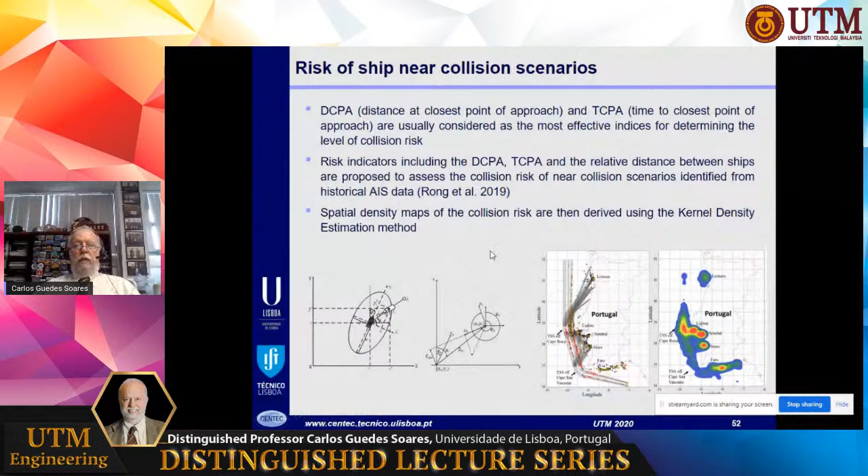So we can then use these situations to identify the areas where we have the highest risks. You see here them identifying, the red will be the highest risk. This is Lisbon port, we have another port here in Setúbal, and this is Sines. So it is at the entrance of ports where we have the highest collision risks, as estimated by this model. This can also identify the collision from all encounters, and these are just from crossing.

We can also identify ship types. So this is the risk for tankers. We have different ship types. So this type of study can be taken to different levels of detail.

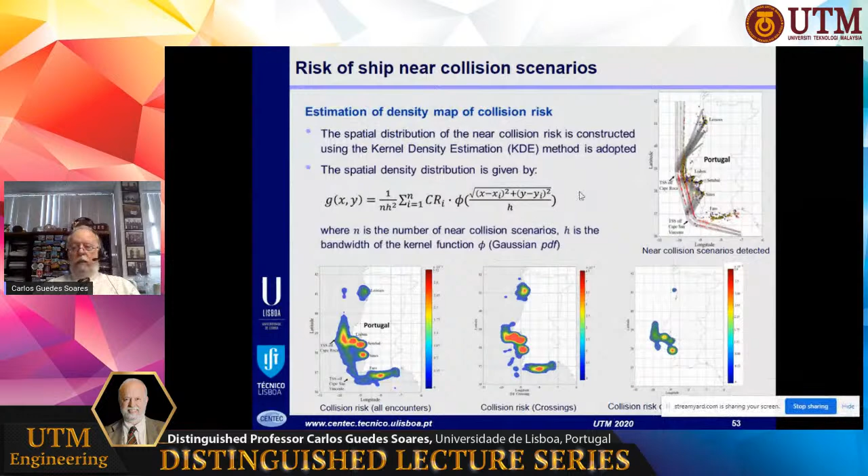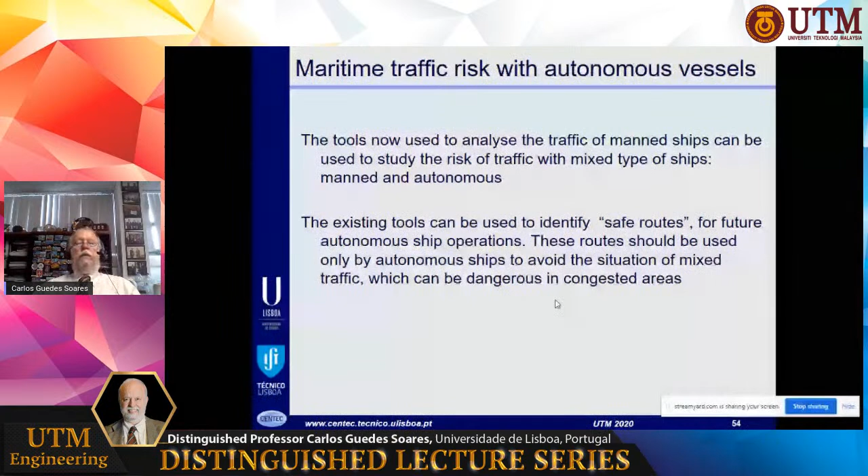So all these tools that are used to study the safety of traffic of manned ships can now be used to study the mixed situation where we have manned and autonomous ships. And the concept that has been considered is to identify safe routes for future autonomous ship operations, that is, to segregate the operation of autonomous ships from the mixed traffic so that in the congested areas they are separated and it will be easier to manage the situation. So that's how we are dealing with the safety aspects.

Just to close up, some brief idea about economy. I'm sorry I'm going a little bit over time. The economy is the other aspect. There have been very few studies about the economy of operation of maritime vessels. I will give you two examples of the very few that I was able to identify in the literature.

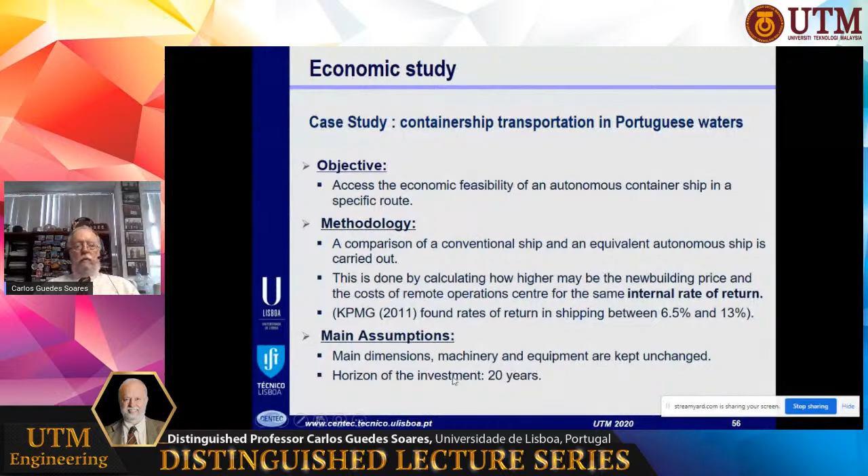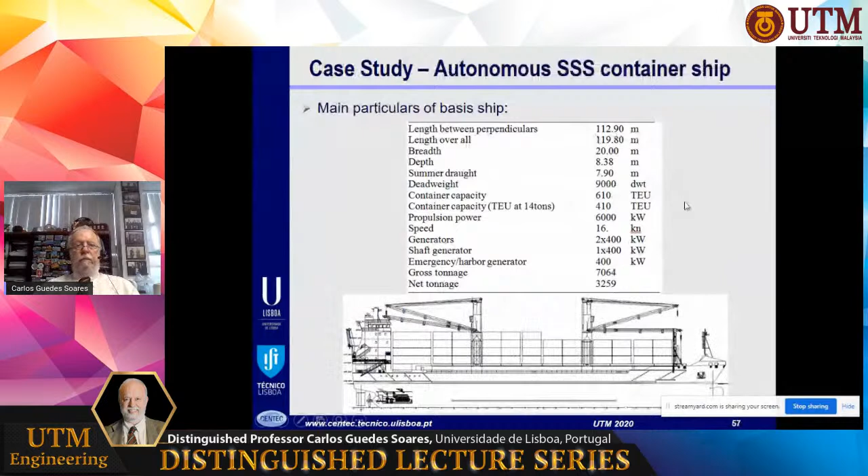One case is a study that we made: a container ship transportation in Portuguese waters. We are studying the economic feasibility of substituting a container ship by an autonomous container ship. So we started from the conventional ship and made some design changes to make it autonomous. We maintained the main dimensions, the machinery and the equipment, and considered a 20-year investment period. This is the initial ship, it transports containers, it has 112 meters, so it's a relatively small ship. The route is from Lisbon to Porto, then to Açores. It stops in two places and then comes back, so it's a distance of 1,900 nautical miles, representing 120 hours of navigation, about 2 weeks for the ship to complete the voyage.

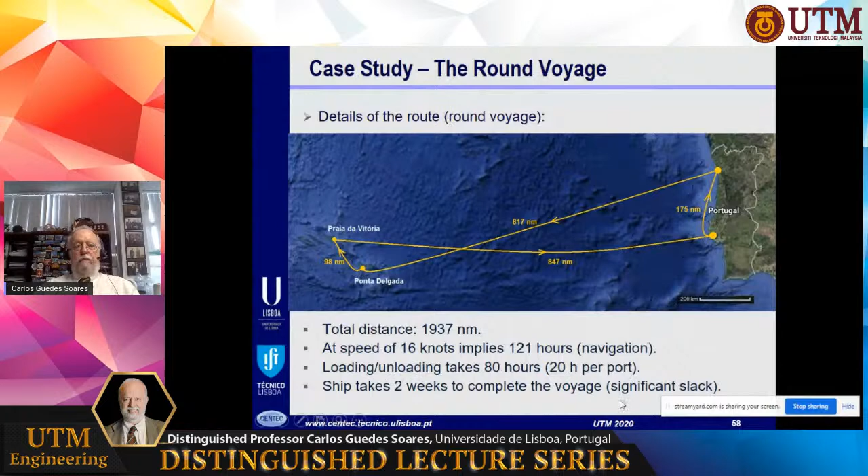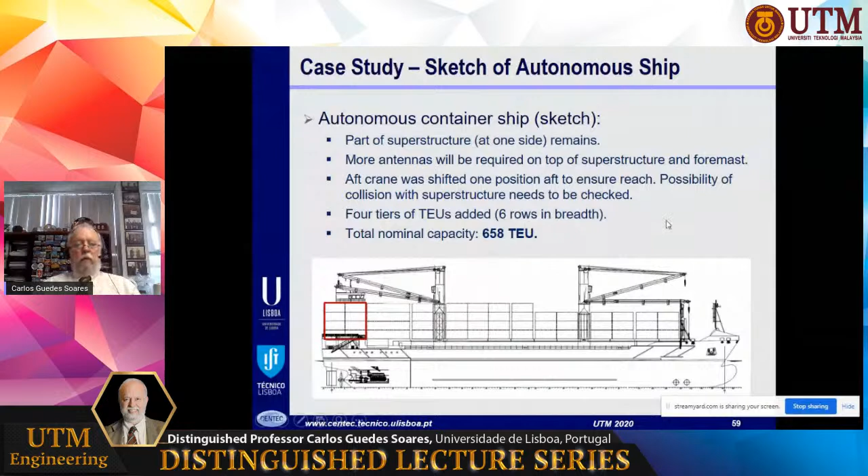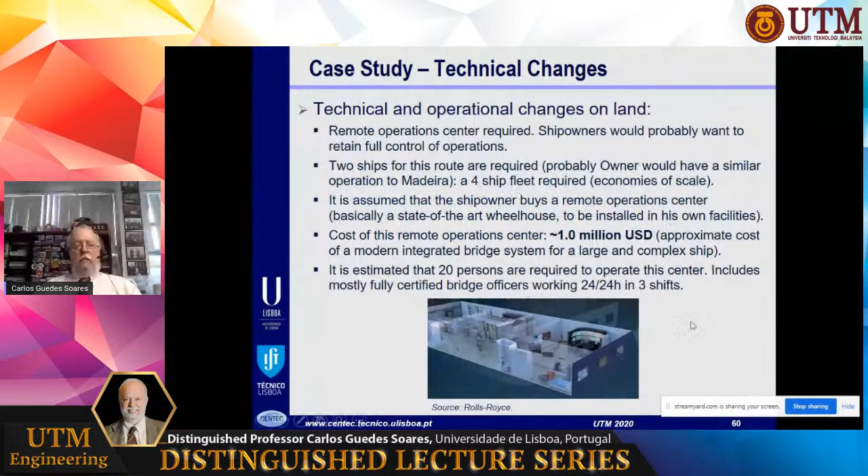The changes made in the design are to reduce the superstructure, because not having men on board, we don't need so many living quarters, and this space has been used to add additional capacity for containers. So instead of 610, now it has 658 TEUs that it is able to carry. We also consider that it's necessary to have an onshore center to make it more profitable. We considered that the fleet was larger than just the ship, so there was a 4-ship fleet that would be monitored by this center. The conclusion from this study is that the ship would have slightly more cargo capacity, we increased the cargo capacity by 8%.

There are several components of costs, and voyage costs that decrease significantly, increasing the revenues. However, the remote center requires significant capital, and keeping the same investment return rate, the new building price of the autonomous ship would be about 1/3 higher than the conventional ship. So the new building will be higher, but we have revenues increasing from the operation. So this was an exercise that gives some idea of the order of magnitude of costs involved.

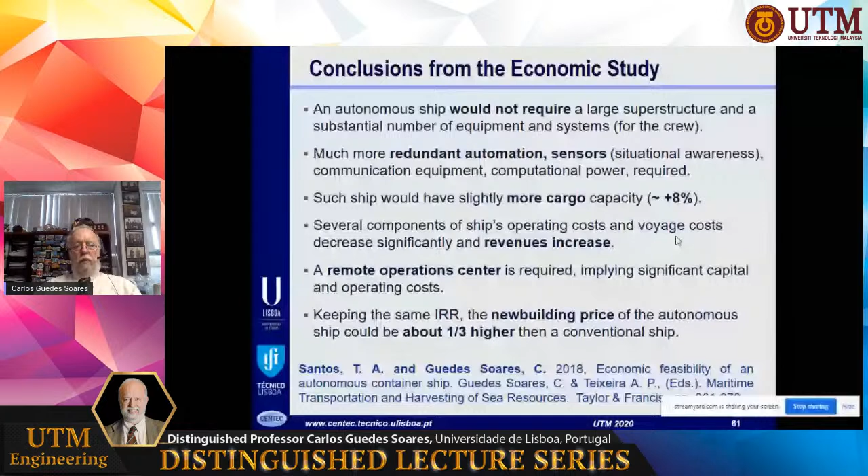Another study was made with a bulk carrier. It was made a few years ago, and here they are comparing the operating costs of a conventional and an autonomous bulk carrier.

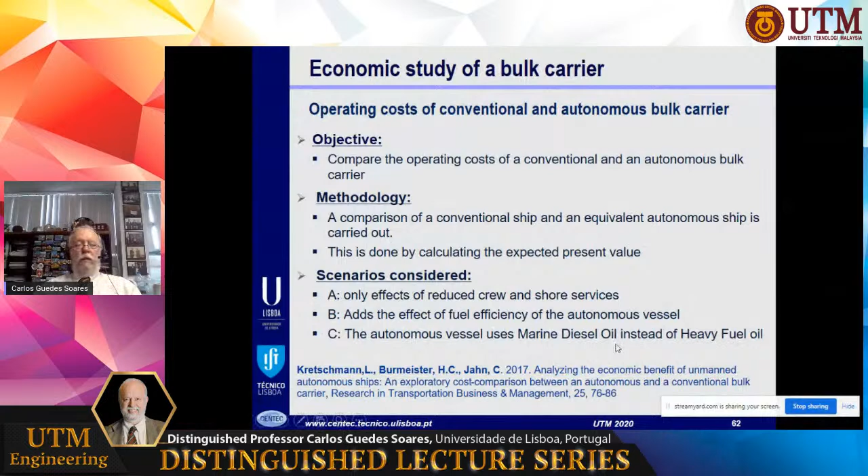The comparison is made only on the operational costs, calculating the expected present value. Three scenarios were considered: reduced crew, adding fuel efficiency in the sense that fuel is not used for onboard systems, and a third scenario where the ship is operated with diesel oil instead of heavy fuel oil, since heavy fuel oil is a complicated system to operate without men on board. This would be more realistic, but more expensive.

The results showed the cost of the reference vessel. In scenario A, the cost stayed more or less the same. There was a slight improvement in scenario B, but in the last scenario with diesel oil, the costs were much higher. So this gives you some idea of where we are with the economy.

There are no clear answers yet. In some situations, savings appear to be possible; in other cases, it appears it will be more expensive. So we still have to clarify this issue before having a final answer.

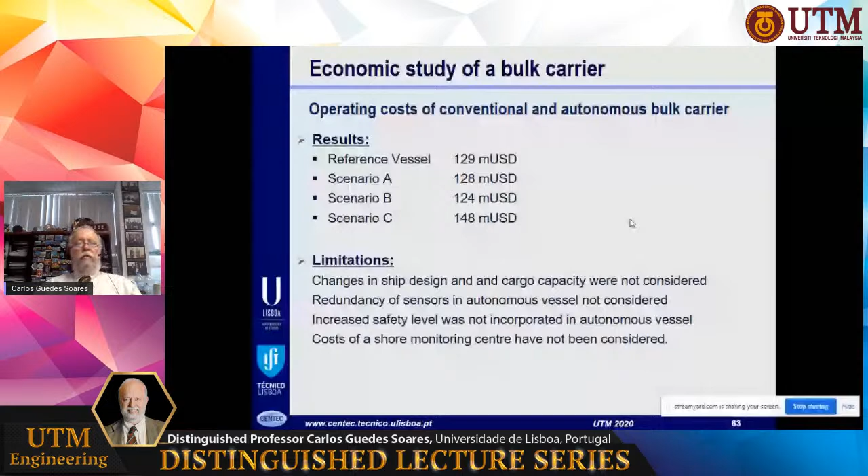The overall conclusion is that we have the basic technology for path planning, guidance, and control, although we need improvement in situation awareness and fusion of sensor data for short-range information. We still need to demonstrate the safety level associated with the operation of these ships, demonstrate that they are profitable from an economic point of view, and we need a regulatory framework to operate these ships. So there is still a lot of research and work in front of us before this becomes a reality.

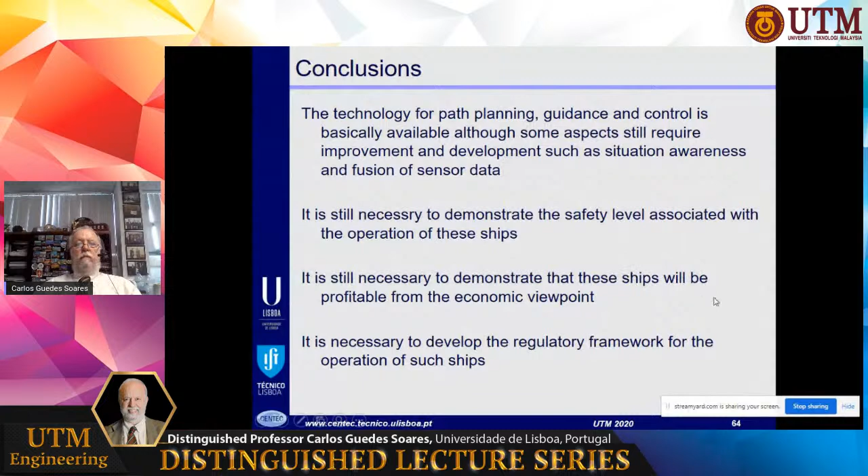However, the basic technology seems to exist, and it's a matter of working on it and trying to improve the situation. I'm sorry for taking a few more minutes than planned, but I'll be available for any questions now.